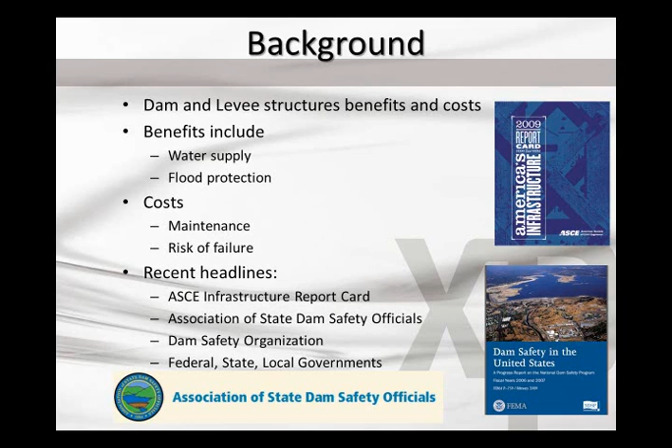Pretty much everyone acknowledges the need for serious investment in dams and levees and the need for engineers, especially flood and emergency action planning related engineers, to estimate our risks of flooding and of catastrophic failure. Given the grades that are out there, which you see on the screen here, water and environment dams, we've got a D in North America on the level of maintenance and of safety that has been put into the dams.

In 2009 we've got a D- on levees and a D on dams, and the investment needs to keep our dams and levees safe are significant, especially in an economy where there's not a lot of extra money to go around. It is projected that there will be a significant shortfall in upgrading and in maintaining the dams and levees that are around us. So with that bit of background, I think that most everyone that's logged on today recognizes the need to prioritize the maintenance and the upgrades of our dams and levees.

And one way to prioritize that maintenance is risk assessment, and modeling forms a critical part of that. Modeling dam and levee failure can help us understand the risks and the costs associated with each structure. Based on the highest risk, then we might target the funds to maintain or upgrade those dams and levees that would have the greatest impact if they were to fail.

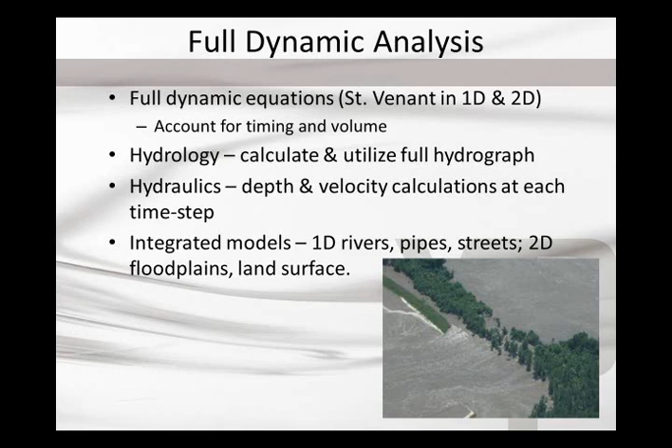All right, well, I'm going to step through several examples today looking at XPSWMM and XPStorm tools for integrated one-dimensional and two-dimensional modeling. As I said, this modeling would be based on a fully dynamic analysis, meaning it's not steady state. I won't talk much about hydrologic simulation today, although those options are in there.

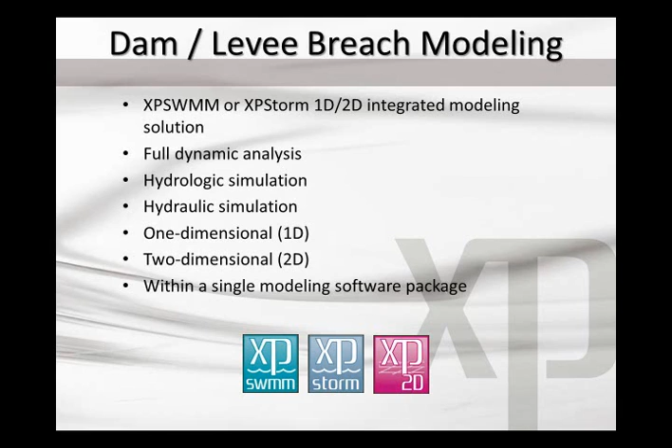I will note the hydraulic simulation options that are available to represent dams and levees and pipelines and the breaching mechanisms that may occur. So I'm going to launch into that, and let's have a look at some things.

The way that a dam or a levee breaches, sadly, is not fully modeled in XP products. So the physical breaching is still an area of research for several organizations, ourselves included. Where we're trying to get with breaching is ultimately arriving at a flow versus time, or a hydrograph, and a total volume that we expect through the breach.

That can be done independently, outside of XP products. There are a lot of rules of thumb. There are a lot of people that have their own little analysis that they prefer to calculate the water that would be released in a breach event.

There are also some simple options in XP software that I will show you to physically model a breach, but there are many improvements needed and many improvements coming, I think, in the industry to better analyze the physical breaching.

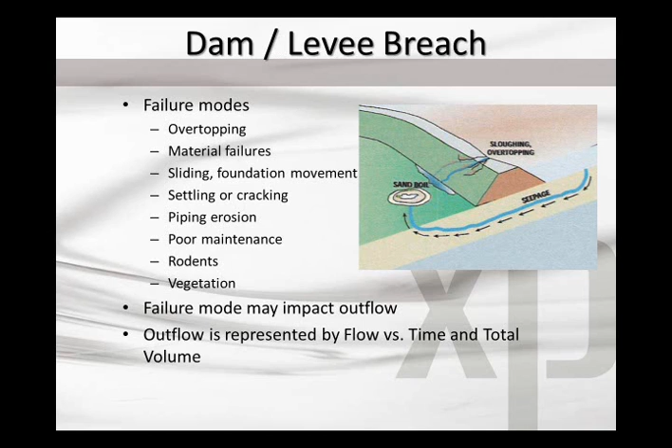Let's jump in and let's first talk about dams. I'm going to talk about dams and levees separately here, although everyone, I think, will recognize that there are a number of commonalities. A couple things I've already said: dam breach assumptions are often made externally, but once we make some simple assumptions or decide how we're going to go with our breaching, the flow from a breach in XP products can be handled in several ways.

We might send flow down a channel, a one-dimensional channel. We could send flow from a breach to the 1D channel, plus letting it spill to overbanks. We might also send the flow from a breach directly to a two-dimensional domain and let it spread and go where it will. So dynamic flood wave propagation can be modeled in 1D or 2D or a coupled 1D/2D. The point of this is to aid flood mapping and emergency action planning by being able to see how deep, how fast, and where the water went as a result of the breach.

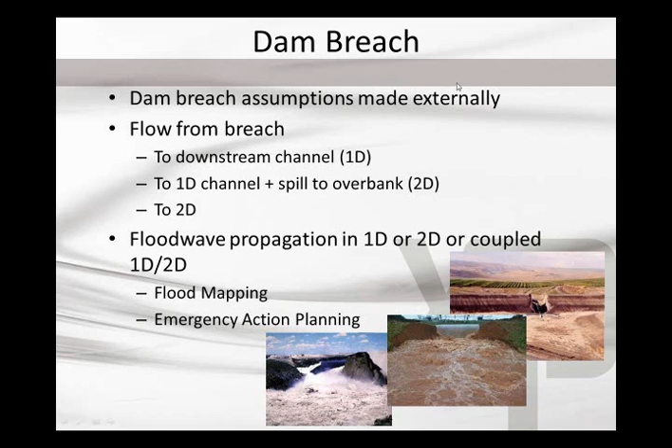The river channel in this scenario would be modeled much like a HEC-RAS model. We've got a center line, we've got cross sections. What we're lacking is the flow that is going to go down that channel. One way to do that is simply to input at the upper end, or the upstream node of our model, the breach hydrograph. Where do we get the breach hydrograph?

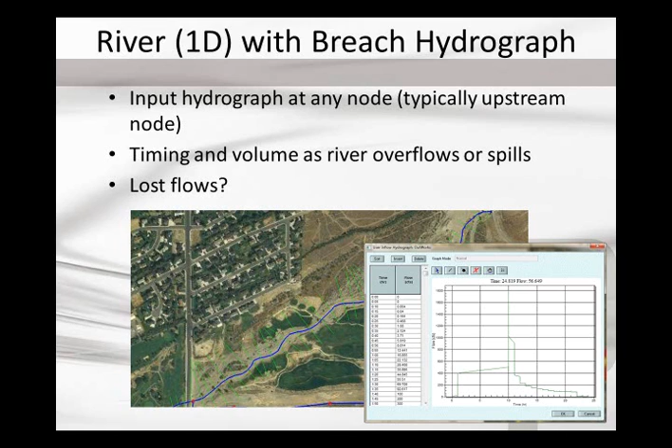Now, if we do this, the model is going to compute the timing and volume as the river overflows or spills out into the downstream channel. What we won't get here is lost flow calculation. So if the hydrograph I try to send through this river channel exceeds the capacity of the river channel as set up in 1D, I'm going to have some lost flow, and that's not going to work out. However, I wanted to show you this one simple option for breach modeling. Simply input the breach hydrograph at an upstream node, or really any node in the model, and let it run, and it will model that hydrograph down through the system.

A slight variation on this would be taking a 1D river and using a storage function in a 1D model in conjunction with real-time control, RTC. So in this same model, up at that debris basin in the upper right corner, I could designate the storage of that debris basin, a simple storage capacity curve, which is available in this case, and then in the XP SWMM or XP Storm interface, I can apply a variable weir or orifice or rating curve at that upstream node.

What I mean by a variable weir, orifice, or rating curve is that I can have that change over time. So the weir could start out at a certain level and over time erode down to an invert level of the basin, essentially washing away part of the embankment.

Similarly, an orifice could be used to model a piping failure where we gradually open a flow area and it gets bigger and bigger over time. Once again, we're going to have timing and volume accounted for as the flow is released to the river channel. We still could have lost flows, so that's not good news.

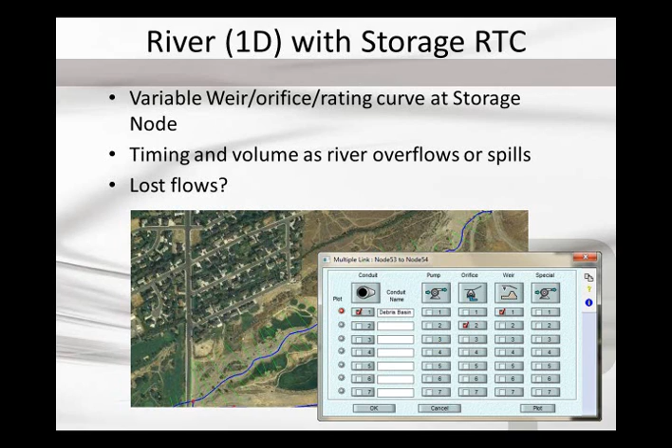But the way this is done in XPSWMM is fairly easy. At an upstream node, I can simply check on that I've got a weir, and I've got an orifice, and the storage at that node then could escape through this weir or orifice. Now the weir and orifice I could then designate in my real-time control dialog.

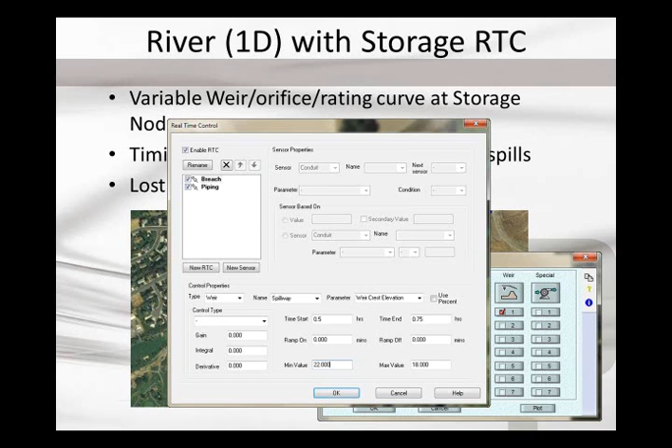So I've got a 15-minute failure time here where the weir is going to go from 22 feet in elevation down to 18 feet in elevation. So we're going to erode away 4 feet of that weir in 15 minutes, essentially knocking down the spillway to the invert of the debris basin.

When I do this in 1D, what I get would be 1D modeling results. So I'm showing here on the screen a simple slide showing the long section view of the river. And of course, with 1D results, you can see the flood wave move down the river. Let me start that again. The flood wave moves down the river.

You can also see in the lower left the cross sections in the river and where the depth is in each cross section as the flood wave propagates down there. Finally, in the lower right, those are actually graphs of depth versus time at each cross section. So there's a variety of outputs that XPSWMM or XPSTORM can provide for 1D results.

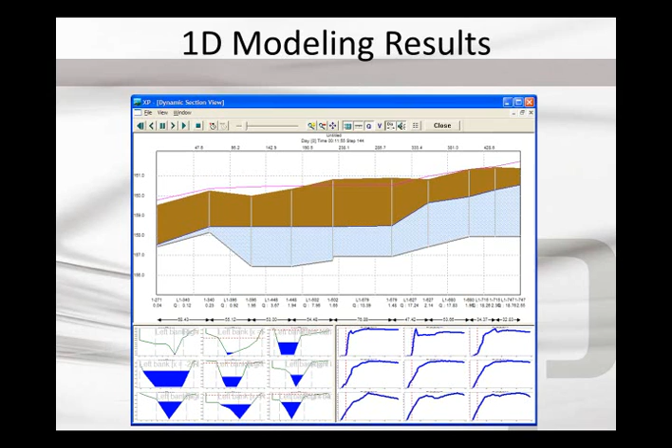Of course, some of those of you with a sharp eye would notice when that animation happens, a few of the cross sections that we showed actually hit the top end, and that means that I've lost some flow. When water level reaches the top edge of your cross-section, chances are you're imposing some false assumptions. You're starting to impose an imaginary vertical wall on the top of your cross-section, and that's not accurate. So maybe we go to the next stage of breach modeling with 1D.

What we'd like to see, rather than a 1D profile view or cross-section view, is something like I'm showing on the screen now, which is the result of water being released from the detention basin. You can see that detention basin in a little more detail here in the upper right corner. I'd like to see that water escaping and being allowed to both follow the channel, which you see in the yellow and the green colors, as well as being able to escape and go out into the floodplain that might not be reached by my cross-section.

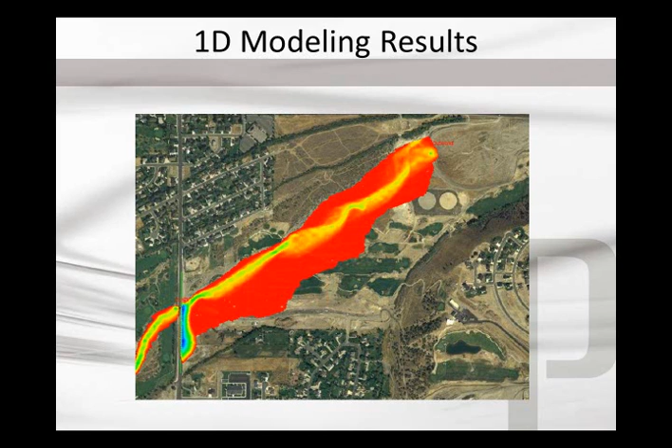How do I get my 1D modeling results to do that? Well, I can make big cross-sections and then take my 1D results and go to a GIS and start extrapolating and then creating a flood map. Or I might use the next option in XPSWMM or XPSTORM, which would be, let's link our 1D river and the breach in our 1D river to a downstream channel that is allowed to overflow to the overbank areas, which are represented in a two-dimensional manner.

What I'm showing on the screen now is the upper end of a highly urbanized channel. You can see in the upper right corner there is a reservoir in the corner of the city. If we were to breach this reservoir and allow it to travel down the 1D channel, you can see in the 1D channel there are a whole lot of cross-sections. On this curve you can see some of them spaced out, but there's a lot of cross-sections down through that channel. But what will happen if we breach that reservoir is that that channel will not hold the breach hydrograph. Along the edges of the channel you might be able to see a blue line.

That blue line is what we call our interface line between a 1D channel and the two-dimensional overland. So what it allows XPSTORM or XPSWMM to do is let the water out of the channel and let it run across the land.

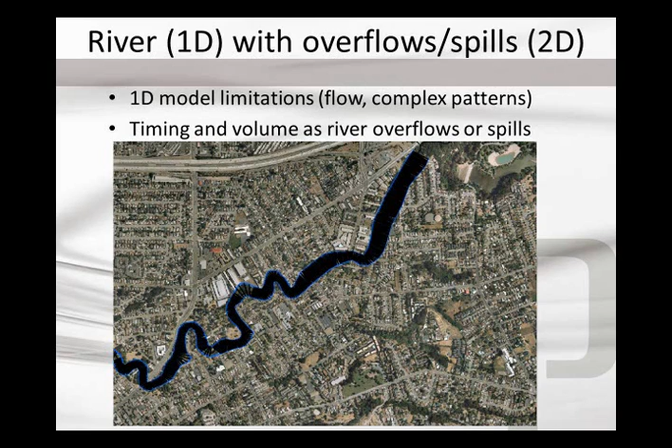The next slide here will show the effects of linking your 1D river with 2D and allowing overflows and spills to exit the channel. Now keep in mind that I've still used the same breaching mechanism as I showed previously. I simply input a breach hydrograph that was calculated outside of XPSWMM or XPSTORM, or I used a variable weir or orifice to simulate a physical failing and releasing a pool of water.

Either way. Now, what happens, you'll see as I run this animation, is that water comes out and stays in the channel for a bit, gets deeper, and then starts to escape the channel and propagate through the overbank areas. In this case, being a highly urban area, you can see that the water starts to travel down the streets and around buildings and so on.

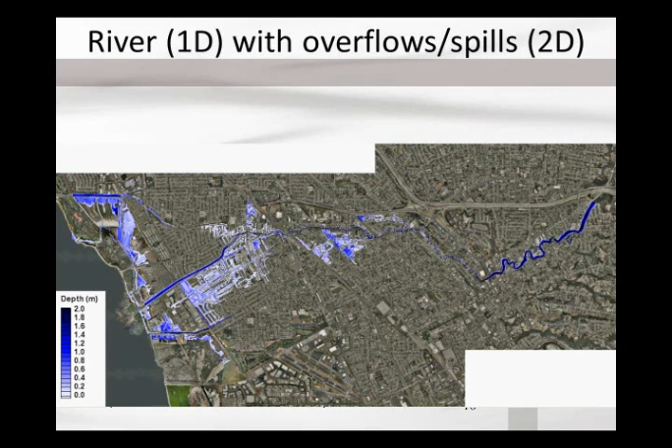So here's an example taking a one-dimensional river-type breach where we breached the dam, let it go down the river until the river channel couldn't hold it. It escaped out to the sides and propagated. So that's a fairly robust and popular way to do the dam breach modeling.

I did want to show you an option where maybe you've got a breach from a one-dimensional channel or a one-dimensional pipe, and that water is released directly to a 2D model. In other words, there is no downstream channel to worry about. It's just a breach out into the floodplain or to the field surrounding a reservoir.

This is great for rapid emergency action planning. So simply saying we're going to fail and see where the water goes, and we want to do that quickly and easily. It works really nicely, and it's easy to do. Once again, timing and volume of the spill is accounted for, and the undefined flow path is not a problem.

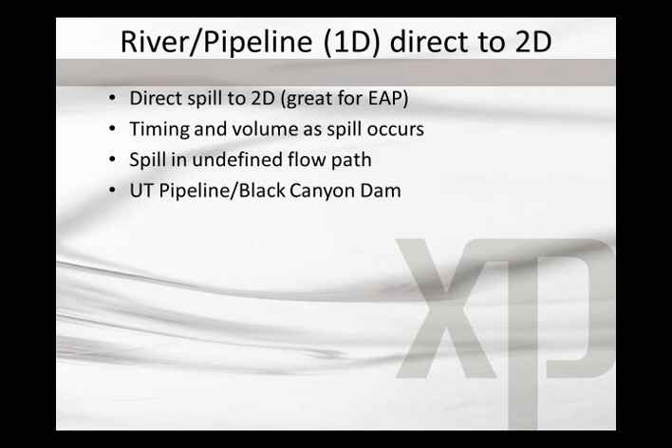The breach occurs at a location, and the water will find out where it needs to go by analyzing the land surface and letting the water run. I'm going to show you a pipeline case and then a dam breach case. The first example here. On the upper left, you will see some arrows and nodes.

That represents a pipeline. It's actually a very large aqueduct that supplies drinking water from a reservoir through to a drinking water treatment plant. And the pipeline is about 18 miles long. And in the locations, you might be able to see the red dots or this orange and yellow crosshatched area. That's where that pipeline actually is above ground.

Mostly it's buried, but in areas where it has to cross some rather severe terrain, some gullies on a rather steep hillside, the pipe actually is up out of the ground. So what would occur if that pipe, which is, if I remember right, a 60-inch pipe running at about 150 cubic feet per second, is breached? For whatever reason, there's a heavy rainfall and a lot of debris comes down that gully, hits the pipe, and starts a breach. This is fairly easy to do.

At the location, we simply can give the dimension of the pipe and the flow in the pipe, and actually let XPSWMM model the entire pipeline, model the draining of the pipeline, assuming that someone could shut off the headworks of the pipeline within a reasonable amount of time, which is, in this case, prescribed in the operations manual of this pipeline. Someone could go shut that off fairly quickly.

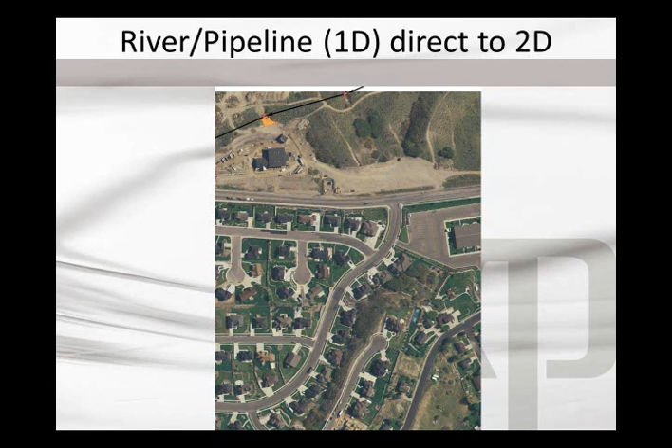However, it still would drain the entire pipeline down to this point. And XPSWMM will compute that hydrograph that comes out of the end of this pipe if it were to breach. Here's the result. The breach is in the extreme upper left, and the water, you can see, actually comes down the hill, finds a low spot.

In this case, it actually travels right by the fire station and City Hall of this little town. In fact, it's pretty much clipping the corner of City Hall, and that's where the fire station is. The doors to the emergency response vehicles are right there. The water in front of those doors, in this case, reaches a depth of about 3 feet.

So you wouldn't want to drive your vehicle out through that. And you can see the water continues down to the right side of the screen and is ultimately caught by a natural channel, a creek that is running through the country, through the fields. It's caught by a creek and then actually empties into a large canal down at the right end.

But very quickly, we can load the terrain data into XPSWMM or XPSTORM. We can put together the pipe with a few links and nodes, breach that, and run an analysis and show where the water will go, how deep and how fast, who's going to be flooded. And I personally put this model together, and it took me about 40 minutes to collect the data, input it, and then run the analysis, which took 6 or 7 minutes in this case, and created, this is the worst case, the maximum flood extent of that breach.

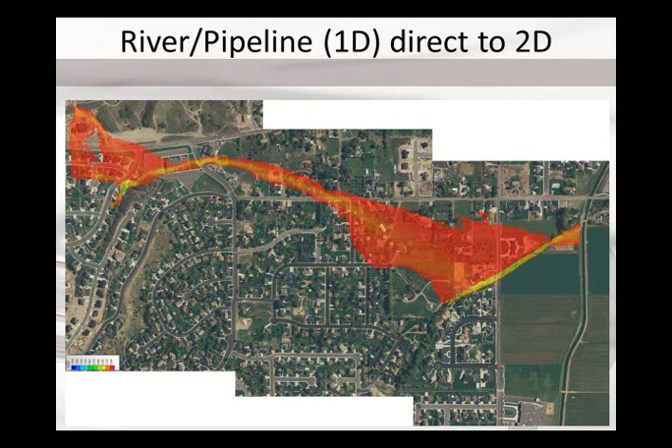Similarly, I could do this breach with a reservoir. This screenshot is of Black Canyon Dam. Black Canyon Dam is near Emmett, Idaho, where I grew up, and it's not a big dam. It's largely an irrigation dam, but it does hold back a fair amount of water. And frankly, it was built in the 20s. And it's received some upgrades, but there hasn't been a whole lot of attention or worry about it because it's not a big dam, so people feel pretty safe.

In this model, what I'm showing is that at the location of the dam, I simply put a one-dimensional node, and I specified the storage of that reservoir. Here in the node data dialog is what I'm showing you. I've clicked on the storage button, and I put in the storage capacity curve of that reservoir. I got the storage capacity curve from where? Well, I got it from the Bureau of Reclamation, who operates the dam.

So I'm saying, let's assume that the reservoir is essentially full, and then what I applied was a real-time control saying I'd like to lower the gates. This has radial gates. Let's open the gates to their maximum capacity, and then let's overtop the dam on top of that. So I did that with real-time controls, and the snapshot there on the right side of the dialogues would once again be the maximum flood extent if we were to have that situation at this dam.

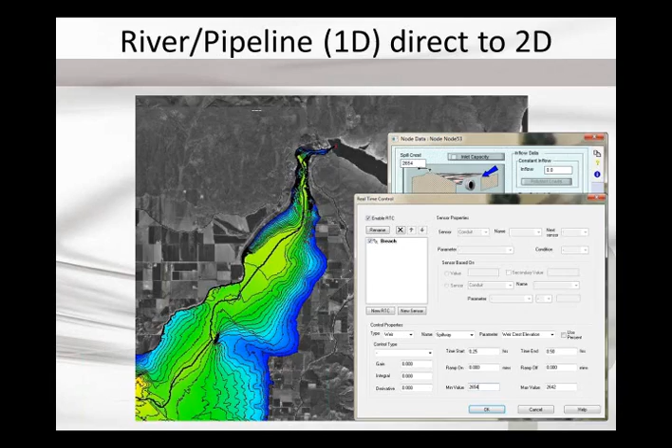Now, what about 2D dam breach modeling? In other words, I don't want to use any 1D. The 1D options aren't any good. What I'd like to do is simply define the land surface and even define the dam in the two-dimensional model. So the terrain of the dam. This would be quite easy to do for a large earthen dam, where the embankments are actually very large and can be adequately represented in a two-dimensional model.

If I've got that in the two-dimensional model, I can specify in XPSWMM one of two things. I can either specify a flow condition along a line. So, for example, along the crest of the dam, I can specify flow or head that's an overtopping condition.

What is more common would be I can simulate a terrain breach. So the two-dimensional model allows me to designate an area, whether that's the entire dam or a certain portion of the dam, and actually tell it, go ahead and erode the land surface away. So in this case, erode the dam away over a period of time and empty the pool of water behind that dam.

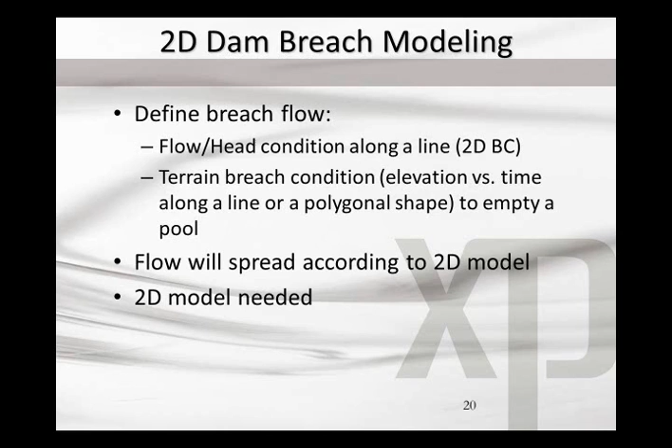This is done completely in two-dimensional modeling. So the flow is going to spread out in 2D, and the key here is you need a good 2D model with accurate terrain and, of course, an accurate dam representation. I'm going to show you here not a big earthen dam, but a small dam that actually exists that people didn't know existed. This is a fairly urban area, and I'm going to run this animation for just a second, see if I can stop it, show you what I'm talking about.

So over here towards the upper right, you see this red spot. This is a case where an extreme rainfall event is occurring, and there is an embankment along the road here to protect these neighborhoods from having to look at the big industrial ugly buildings on the other side of the road. So a nice berm was built, an embankment built for aesthetic reasons. You find that in an extreme rainstorm, a fairly substantial pool of water will form behind that berm.

Now, what was done in XP Storm is a 2D model was built, and along this berm the low point of that berm was selected, and essentially what was done was when the water level in the pool behind the berm reaches the top of the berm, there is an erosion event triggered. As the overtopping occurs, it's going to erode down that berm to the base elevation.

And you'll see that here. I'll go ahead and run the animation. You'll see it's a rather extreme event. So the water builds, the breach happens, and the water blasts down through around the buildings. And in this case, the whole point of this model originally was to protect some proposed apartment buildings down here right on the bay. So the apartment buildings, they were going to put a little flood wall around them to divert water from the street flooding and so on.

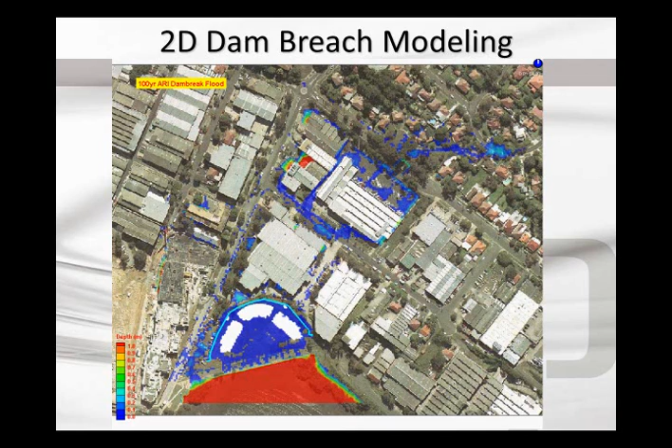Now, I know a lot of people are going to say, well, how accurate is the modeling of the erosion? And look, it's pretty much user controlled. You're going to indicate when it's triggered, so the top level of the berm. You're going to tell it how far to erode and the time to open that breach. So once again, we don't have the capacity to do that geotechnical physical modeling in XPSWMM or XP Storm. We've got the capacity to show the terrain effects and the hydraulic effects of that breach. Okay, so those are some dam options, breaching of dams.

Let's talk now about levees. So levee breaches, slightly different topic. Levee breaches, typically we're talking about a river that is running, and the side of the river, the embankment, is overtopped or is breached for a variety of reasons. The levees then are typically protecting, of course, low-lying, flat areas that are certainly not characterized by obvious flow paths.

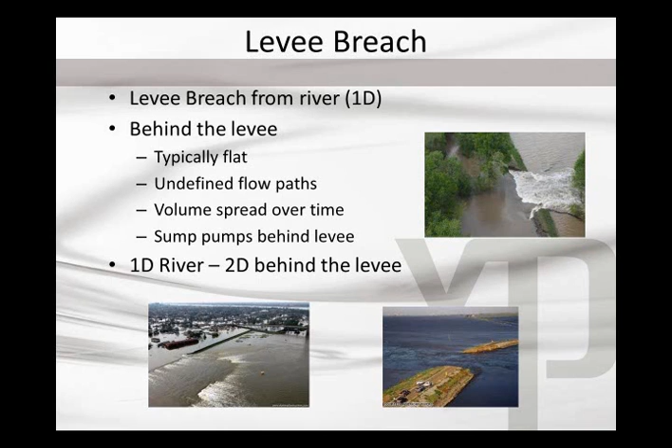Once the water's out of the levee, it spreads out, it goes everywhere, and in some cases, there are sump pumps behind levees trying to pump water back over the levee. There's a variety of things that are occurring behind levees. So how can we model the river in XPSWMM or XPSTORM, and then the breaching of a levee alongside the river? Let's look at that.

First off, a fairly simple way would be creating a river model in 1D. What I'm showing on this screen is a one-dimensional river model. You can see along the curve of the river here, we've got a center line, we've got cross-sections along the river, and that river is protected by two large levees on either side of it. I shouldn't say the river is protected. I suppose the neighborhoods around the river are protected by those large levees.

I can simply designate a node location along the river where I want to let water out. So using the one-dimensional options, in this case I chose this where this red arrow is.

I'm saying right here at this specific location, which is a low point on the levee, I am going to use a variable weir or an orifice or a rating curve and simply let water out. Rather than continuing on down the river, water could go out if it overtops the weir or orifice, if it meets the conditions that I've allowed. Once it's out of the river, then it's going to be handled across the land surface with a 2D model.

And in this case, you're seeing there's actually a one-dimensional model of an interior drainage system behind this levee. So we could get flooding behind a levee because this system backed up, but if this levee overtops or breaches, that's going to be a much more significant flood event. And it's pretty simply done by setting up the river and breaching. These are the same things I talked about a minute ago with one-dimensional to two-dimensional breaching. Just put in the controls that say the weir or the levee erodes away from this level to this level, and let it fly. The water is going to spread out.

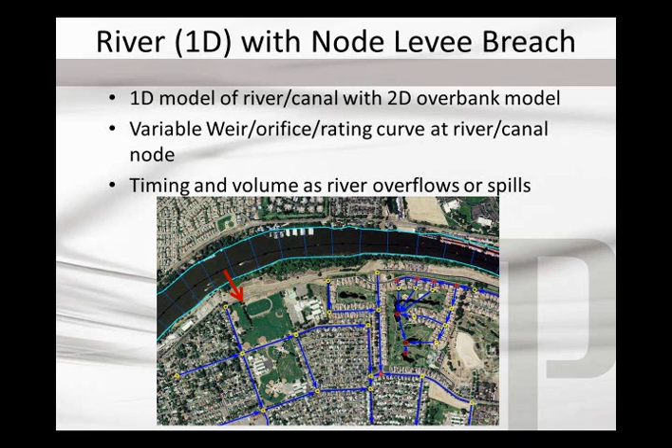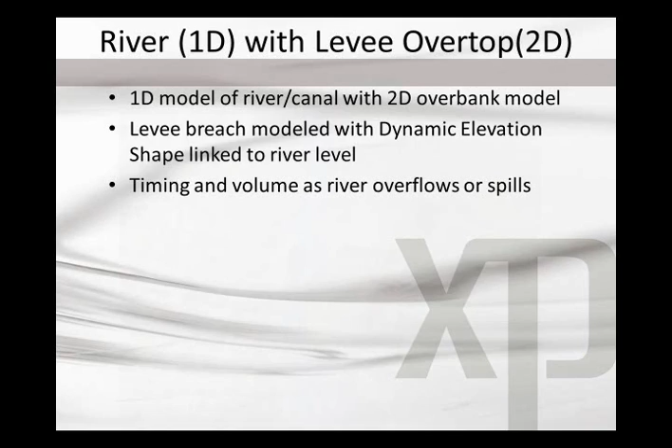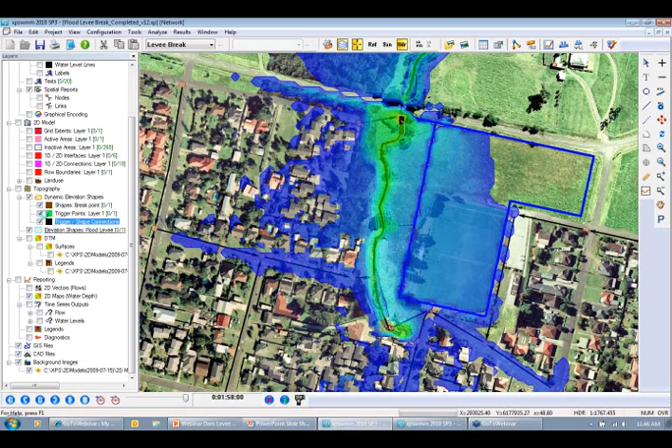Once again, that failure, how does it occur? You're going to have to input things. In this case, let me just show you what was put in there. I'm going to turn off the maps. And if I select that shape, I have to zoom in a bit here.

So I select that shape. What I've designated here is that when the water level at the trigger point, so I designate where the trigger point sits, when the water level at the trigger point hits 42.5 meters in this case, so the water level is 42.5 above sea level, at that point we are going to lower current elevations. In other words, we're going to knock down that wall to 41.5, which is this ground surface elevation there. Going to knock it down, and it's going to take about 15 minutes to erode that, to knock it over.

So it doesn't happen instantaneously. It could happen instantaneously if you want to. Time to reach final elevation, if you put 0 there, you've got an instantaneous breach, a catastrophic failure of a fence or of a wall. It'll fall over and water goes right through. So there's an example, letting a river, letting a channel breach through a certain point.

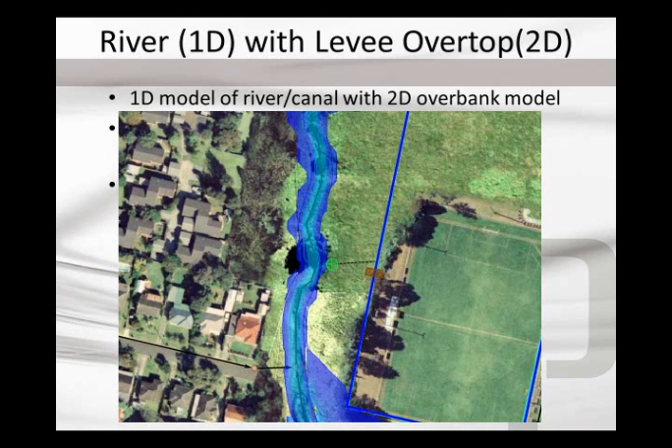How do you know it's vulnerable? Well, there's been a lot of people out for months and months punching holes in levees all over the country, trying to ascertain where those danger points are. That's analysis that would have to be done outside XPSWMM, or in this case, this is simply the low point of the levee where it dips a little bit. This is where it would overtop first, and if it overtops there and we erode away the levee in that area, what will happen? This again is fairly easy to set up.

Let me jump to XPSWMM. I'll show you in this model. I'll turn on the two-dimensional model. So in this case, the entire area is represented in a 2D grid. In the river, the overland, we're just going to model the whole thing in 2 dimensions. Well, of course, we have to have good terrain data for both the bathymetry, the bottom of the river, as well as the land surface. But the whole thing is in 2 dimensions. I'll turn that grid off so we can see a bit better.

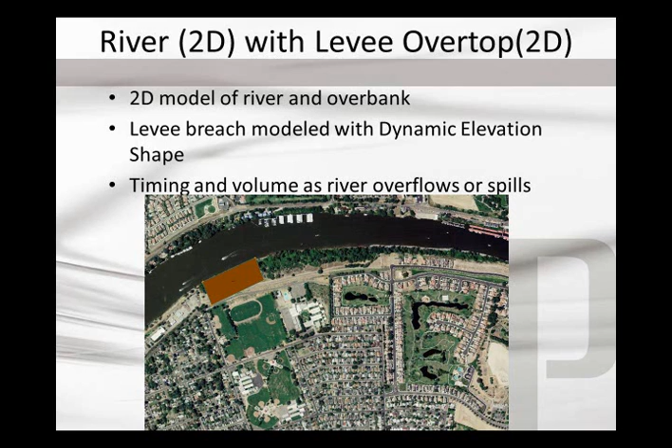All right, regardless of what mechanism you're using here, whether you're doing dam breach, levee breach, or a pipeline breach, using any one of the options that I've showed you today, XPSWMM and XP Storm with the 2D options are going to provide some great output. Inundation mapping, you've got controls on how you want to see that. Do you want to see depths? Do you want to see water surface elevation? What are the categories you want to see? Do you want to see where it's a foot deep, then 2 feet deep, then 3 feet deep? Do you want to see where velocities are highest?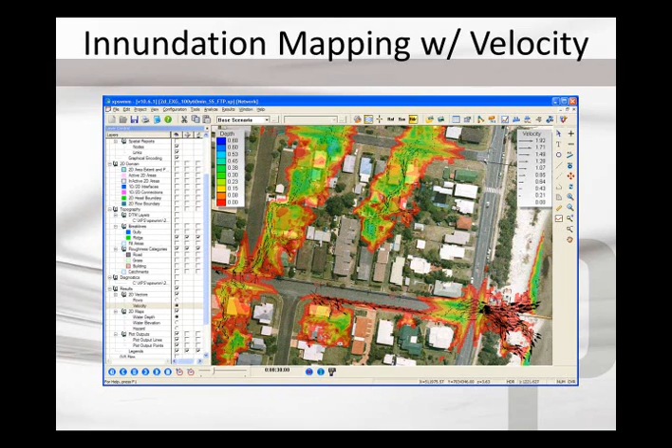I know that there's probably a lot more detail we could go into today. I tried to cram all this into 1 hour, and it looks like I'm just a few minutes early. I got 55 past the hour. So that's the end of the brief overview.